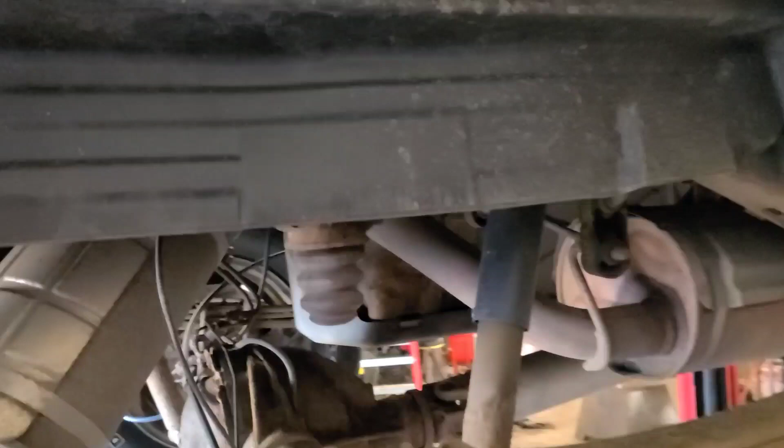So we're back working on this 2009 Chevy Silverado hybrid, and the customer elected to have me do the repairs on this thing, or attempt the repairs. So I'm going to reach up behind this inner fender skirt. You can put a little piece of 2x2 in here, and you can flex the skirt out enough to reach up there and pop the connector off of the frame. I need two hands to do it.

And we're going to try and fish the wiring harness down so that we can plug in the new sensor and see if the code clears. So there's the connector at the top of the frame. You have to push this little push pin out of the frame rail on the top, was quite a challenge. But if you use one of these clip tools, that works pretty good.

And the harness runs along the back of the frame here and then across above the spare tire. So check carefully at the connector back to see if there's any corroded terminals. I don't see anything here. So we're going to wait for the new speed sensor and simply plug it in. Plug it in and clear the code and see what happens.

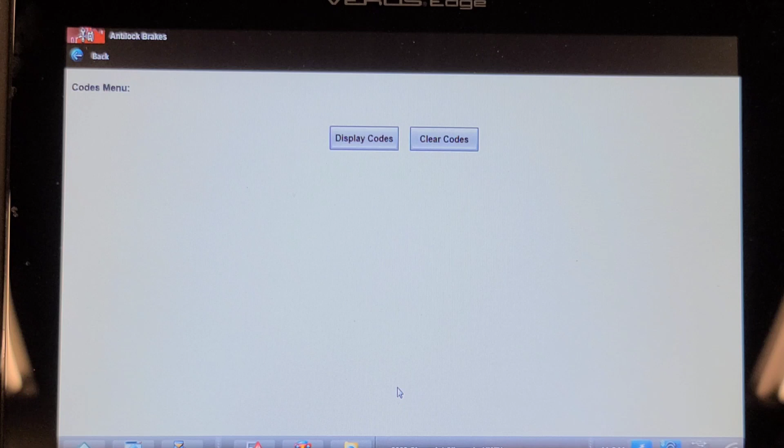Well, I've got the speed sensor plugged in. You see the ABS light is still on, traction control message is still there. Let's turn the headlights off. But the airbag warning light is off, so let's scan it and see what codes we've got. So we're going to go into the ABS, codes menu, clear codes. We'll give that a chance to reset if anything.

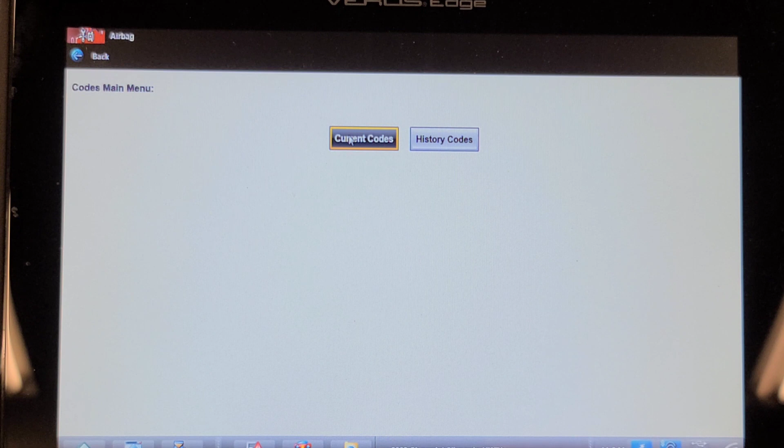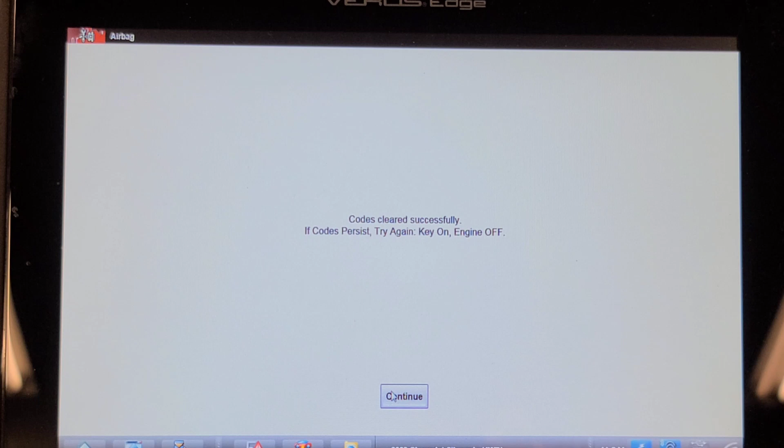We'll go into the airbag, display codes. Shouldn't be any current codes, but there should be a history code for the left crash sensor. Yeah, that's front end sensor 1. 1 is on the left side. So we're going to clear that code. We did change both sensors because the one good one was starting to split, and I put OEM sensors in it. So let's go back into the ABS now

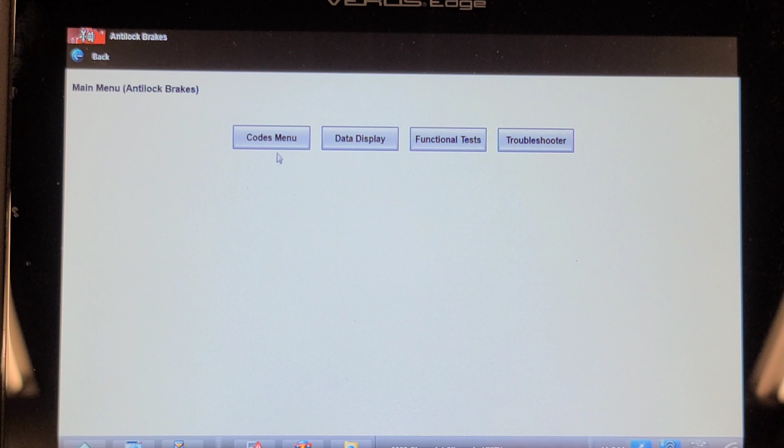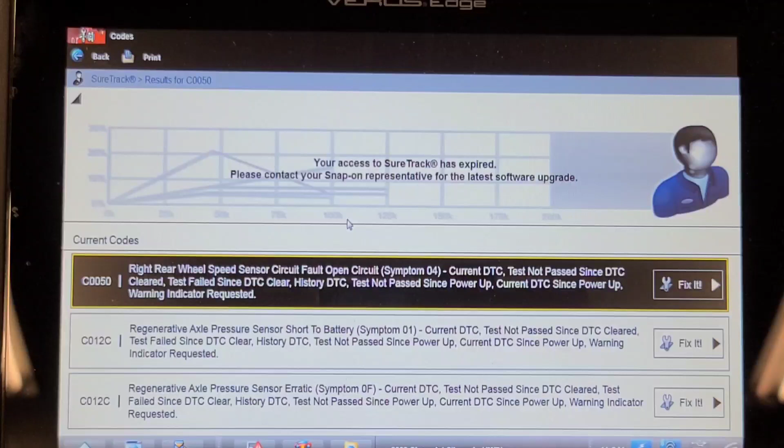and see what codes we have. Current. Oh no, that's not good. So we must have a wiring problem between the ABS hydraulic unit. Now we're going to have to check some wiring. So sometimes the codes don't clear on these ABS systems until you drive it over a certain speed. And I'm wondering if that's the case here.

So I'm going to check for a speed signal from first the left front. Yeah, and I'll go to the right front. Now, left rear. Now to do the right rear, I'm going to have to put a piece of metal in front of the sensor. Let's grab a screwdriver, and I'm going to try and simulate a signal. No, we got no signal.

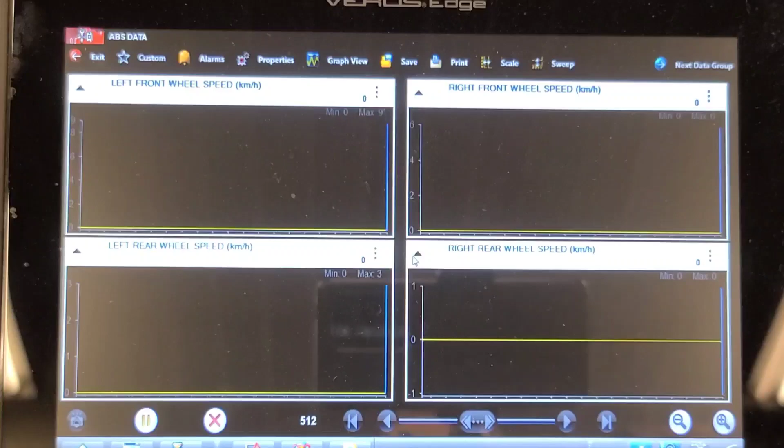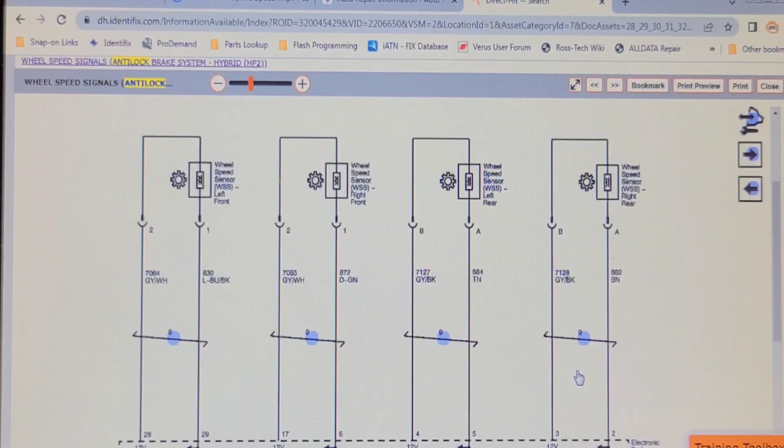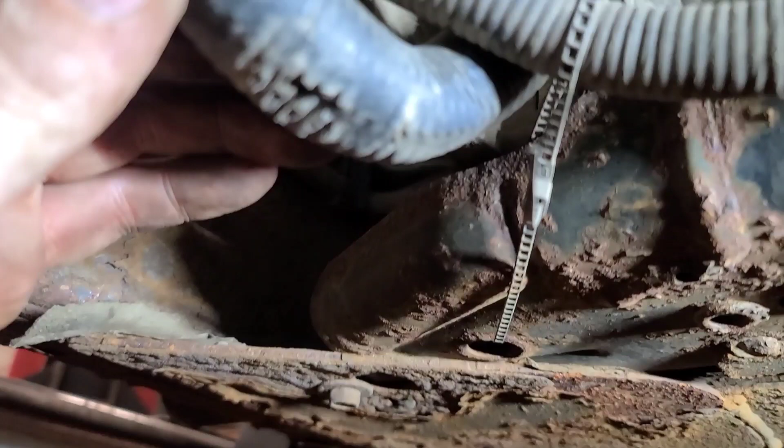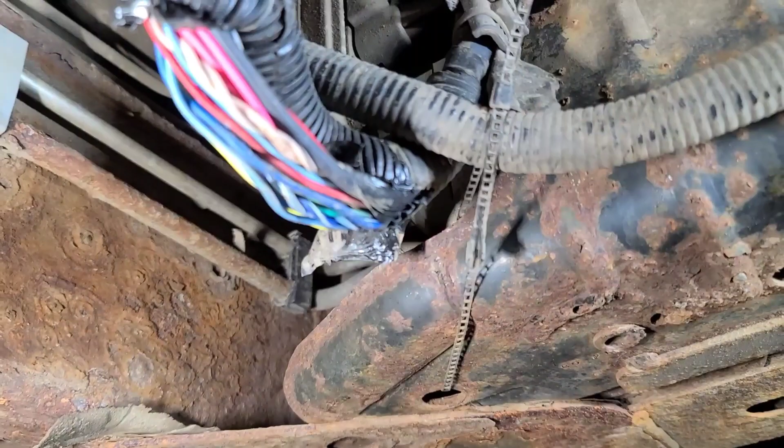So there's a little plastic shield underneath this ABS unit. It's considerably bigger than the non-hybrid version, but the wiring harness has been rubbing on the bottom of that shield, and it's worn through the loom, it's worn through the tape. I wonder if there's a compromised wire right there. So I peeled the insulation off of that. The wires look pristine. Got to find out what color these wires are that we're concerned about. We're going to take the connector apart up here.

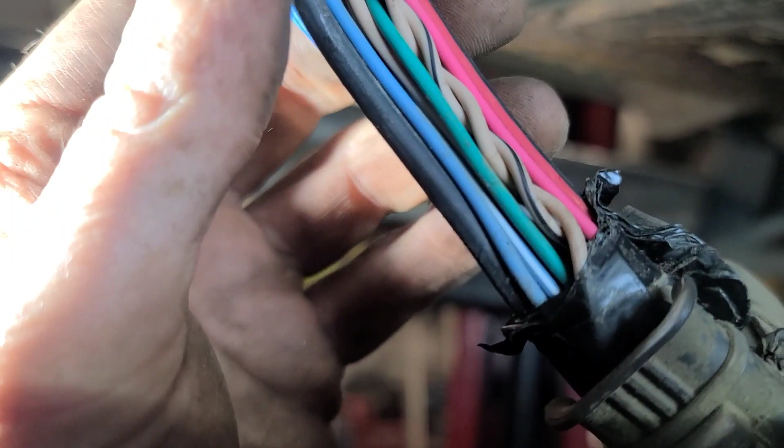So according to the schematic, the twisted pair should be gray, black, and brown. Well, I'm looking at the wires here. And I see, oh, there it is. Gray, black, and brown right there. And that's supposed to go to pins 2 and 3. I'll have to get a magnifying glass to see if there's any numbers on these pins, or get a pin out. I don't want to take this back cover off unless I have to.

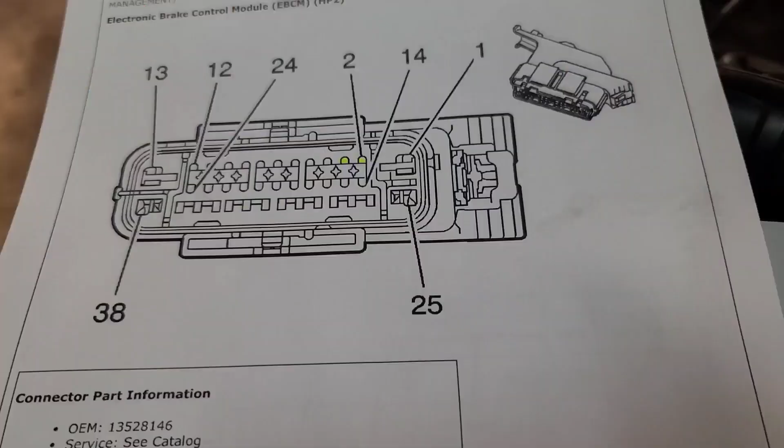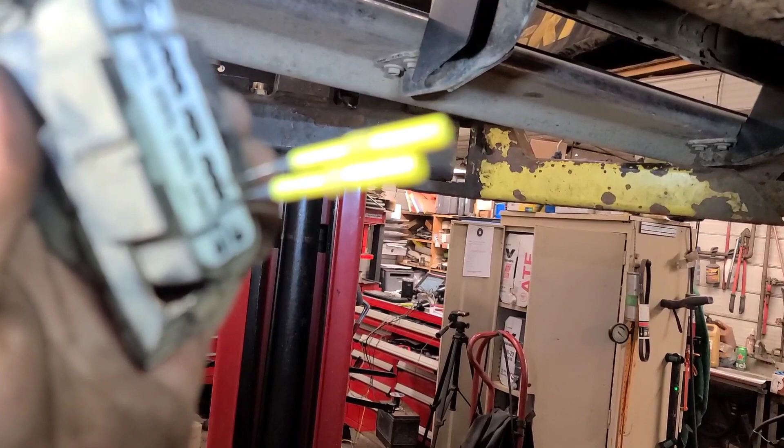So there's the connector view looking into the face. It's pins 2 and 3 according to the schematic. 2 and 3. So I'm using 2 probing pins, 24 thousandths of an inch. Don't use anything fatter than that or you'll spread the terminals inside there. So now we're going to check continuity between here and the back, and I'm going to put a couple of terminals on the harness at the back and jump them together to see if there's continuity now.

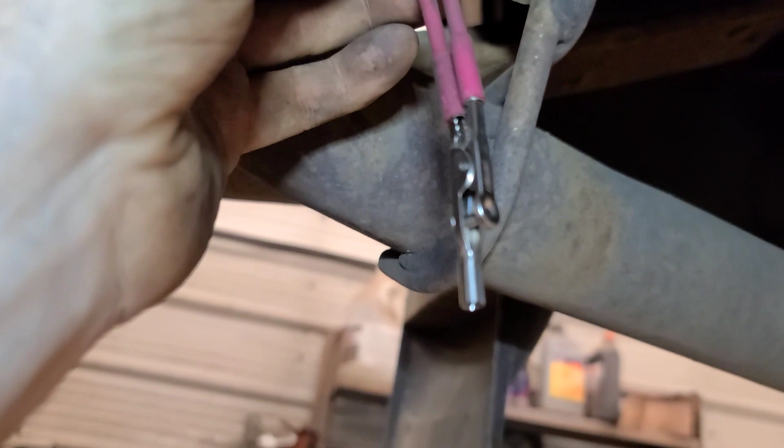So I got my ohm meter connected between pins 2 and 3, and at the back of the truck on this connector I've got 2 terminals in there, and I've got them shorted together, so I should have a loop. And according to the ohm meter, turn off this light, I've got greater than 40 ohms resistance. Let's see. Let's try 400K.

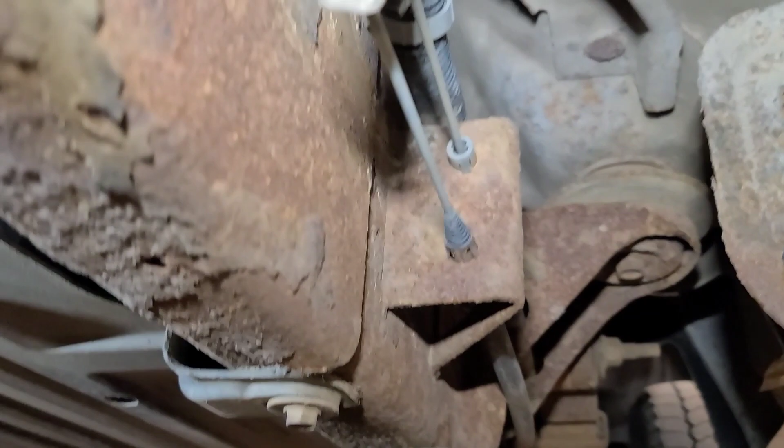So we have a corroded wire someplace. 265,000 ohms. Question is where? That wiring harness runs up over top of the frame, on the outside of the frame. So anywhere it might rub, there's a spot right above the parking brake bracket.

Well, what I'm going to do is graph the resistance and try moving the harness to see if I can see a change in the voltage, or the resistance. Okay, I'm reading 160K, so I'm going to try manipulating the harness. Of course, if the wire is completely corroded through by now, it's not going to change. Let's see if I can go up above the tank here. Above the spare tire, maybe.

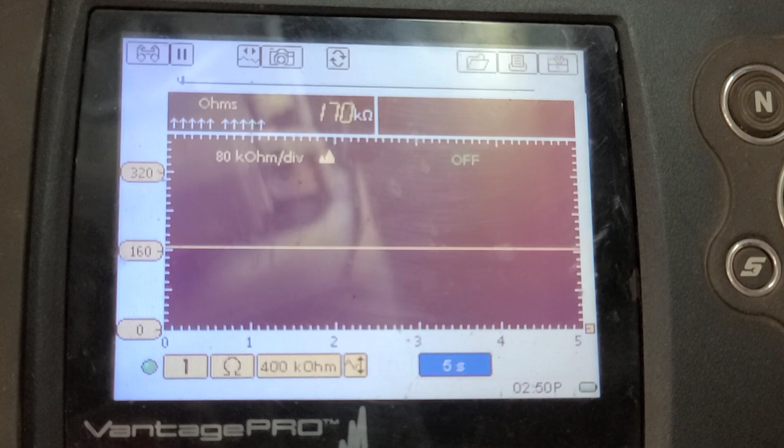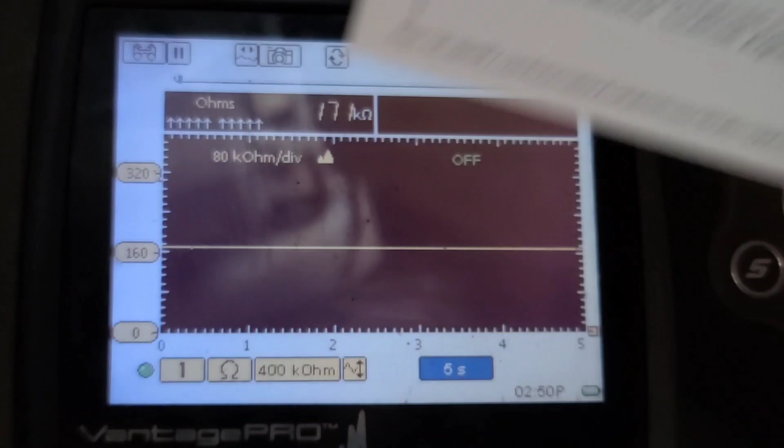Well, I'm going to see if I can find a spot in the middle of the harness to qualify it. There's no connectors in between, according to this. A and B is at the wheel speed sensor itself, and that's where I'm testing it. Well, I'm going to look around. So right at the actual connector, I'm manipulating the wires at the connector, and you can see the resistance is changing here. So something's wrong right in here.

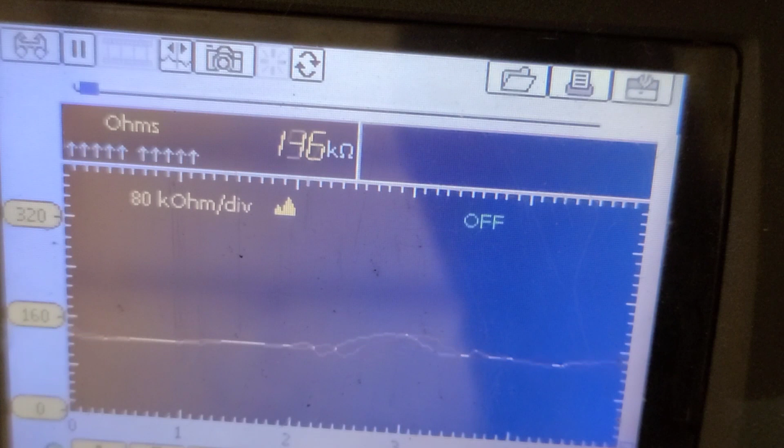Let's untape it. Nobody's been here. Nobody's touched this. Is it right at the terminal? No, it's not right at the terminal, as far as I can tell. Oh, my jumper fell off. Well, I'm going to untape this harness. I don't really want to drop the spare tire unless I have to.

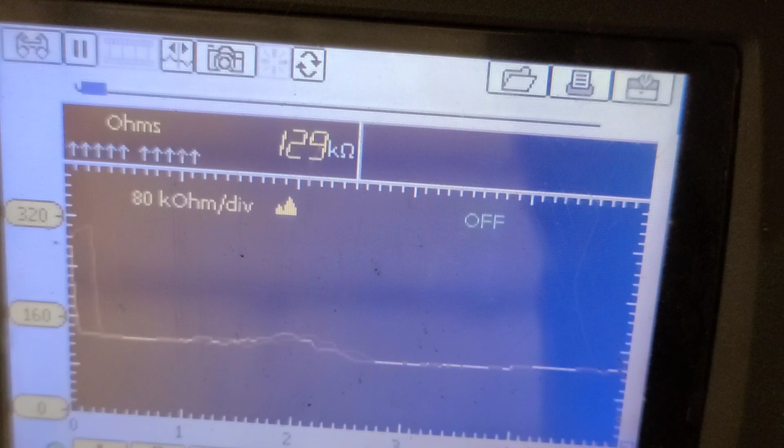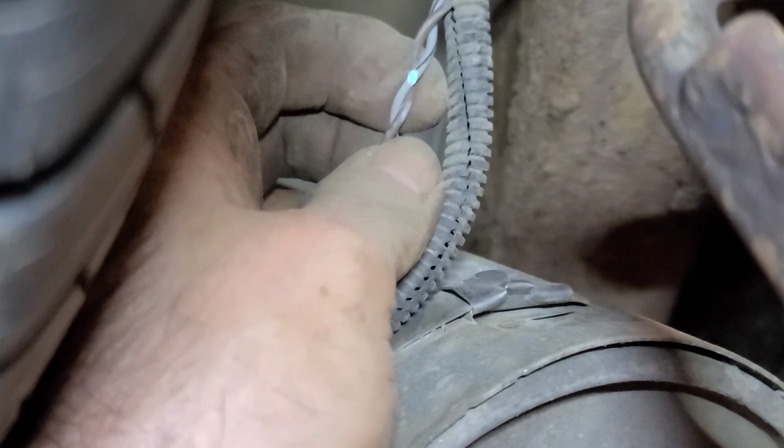Definitely in this spot. Now, how would that get compromised on top of the frame? This is why I love a graphing ohm meter. I'm not even loading the circuit with an ohm meter, but it should have been 0. I'm going to show you what I found. The green death. That's about 8 inches away from the connector. Well, that's the 15% I said yesterday.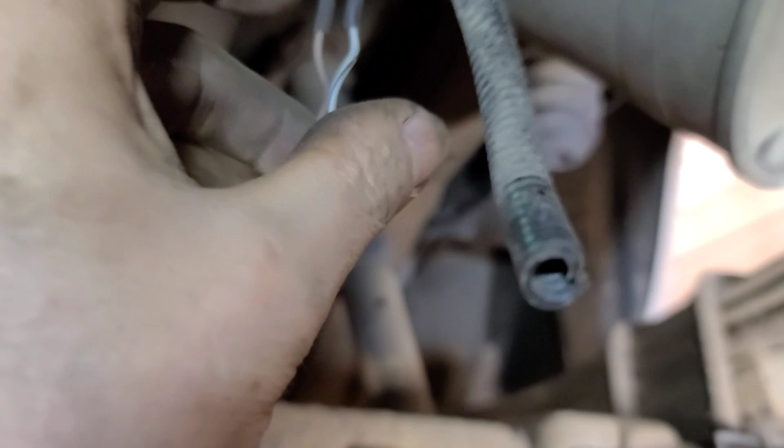So I use uninsulated butt splices and soldered and heat shrunk. I'm going to twist this back up again and tape it back up. Double check it with continuity. So I've got 0.3 ohms resistance. There's the compromised piece of wire. There had to be a pinhole in the insulation and the salt got in there and attacked it.

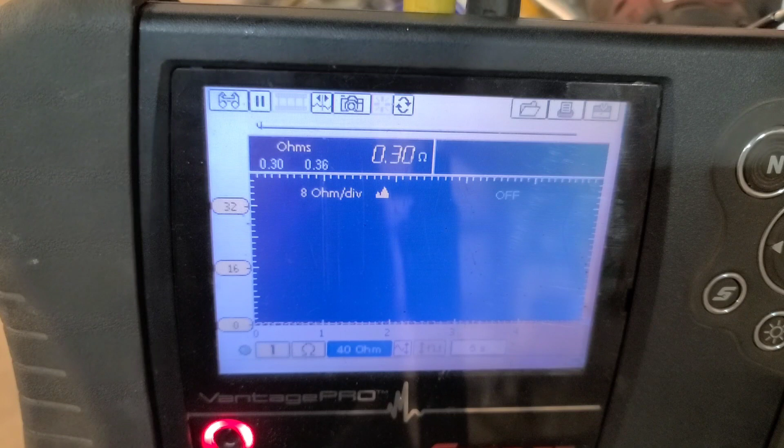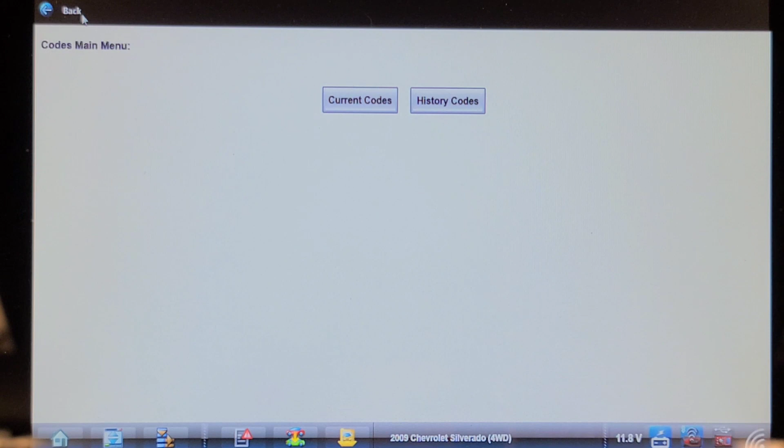So let's tape this up, put this back together, blow the sand out of that connector, put some dielectric grease on it, and hopefully that's going to clear the other code that was potentially going to require replacement of the hydraulic unit. Well, key on. That's a good sign. There's no ABS light. Display codes, current. Okay, we still got these regenerative axle pressure sensors short to battery. Let's see if we can clear those now. ABS light was off.

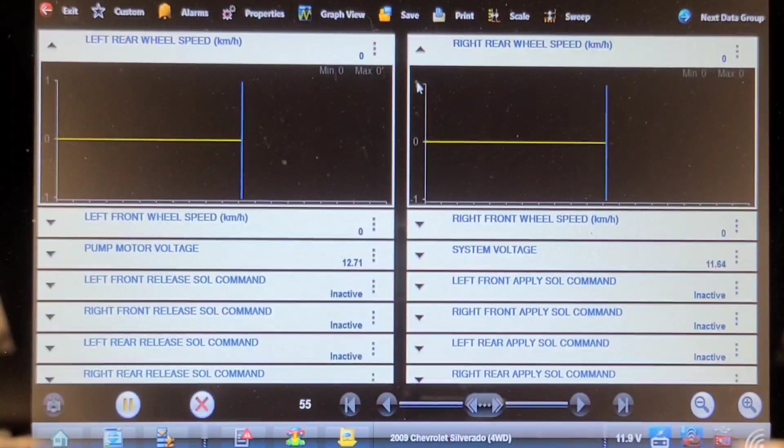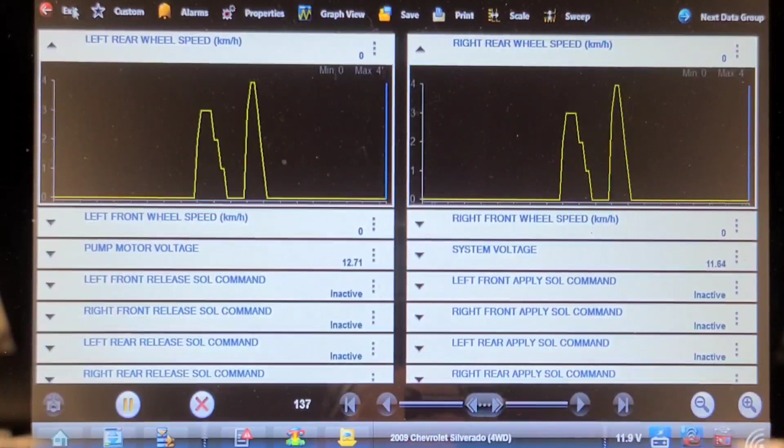Okay. Let's look at data, specifically the rear speed sensors now. Left rear, right rear. I'm going to turn both rear wheels. Good, we got speed signals on both sides. Beautiful. Let's check codes again, see if those regenerative codes came back. Yeah, they did. But the funny thing is, there's no ABS light on. I'm going to take it for a road test and see if they'll clear now.

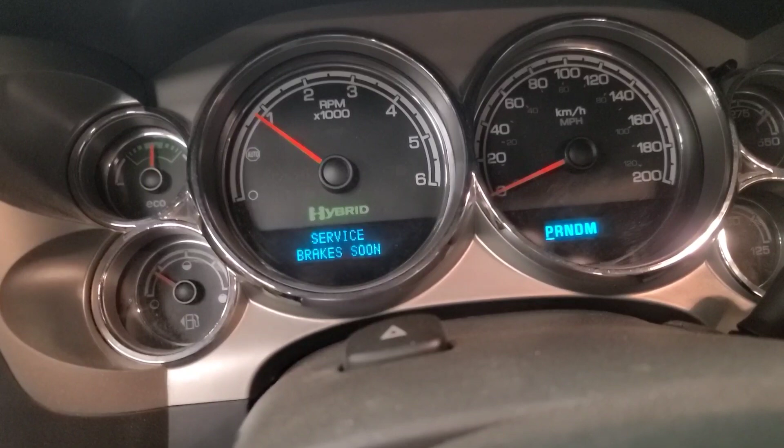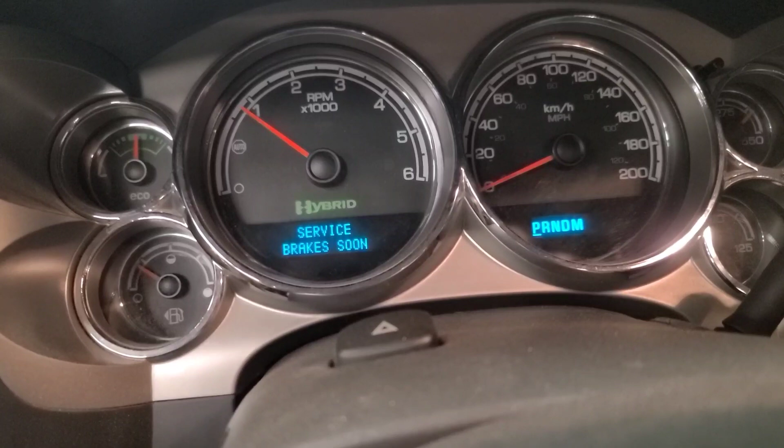Interestingly, the only message on now says service brakes soon. ABS light is off, traction control, StabiliTrak light, airbag warning light, and check engine light. I did change the 2 oxygen sensors as well. It said something about reinitializing, or let's read that fault code troubleshooting chart again.

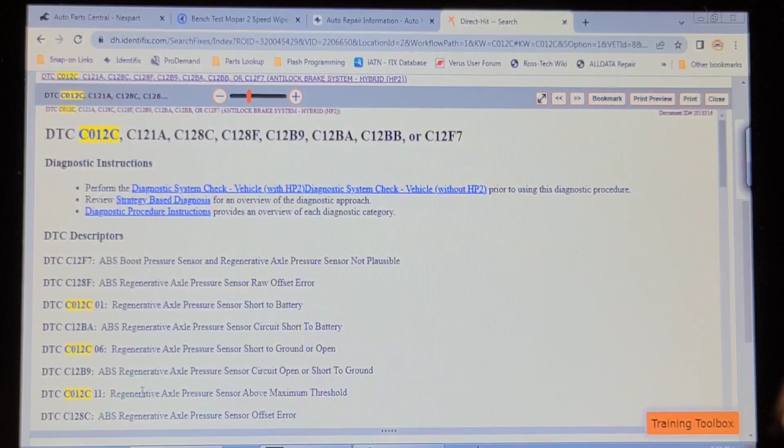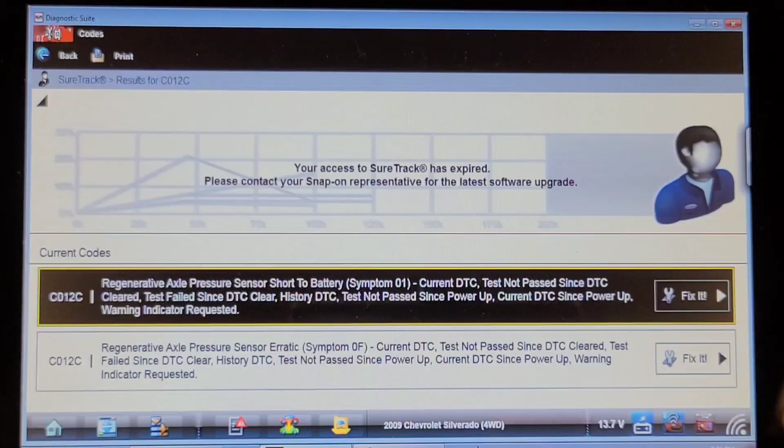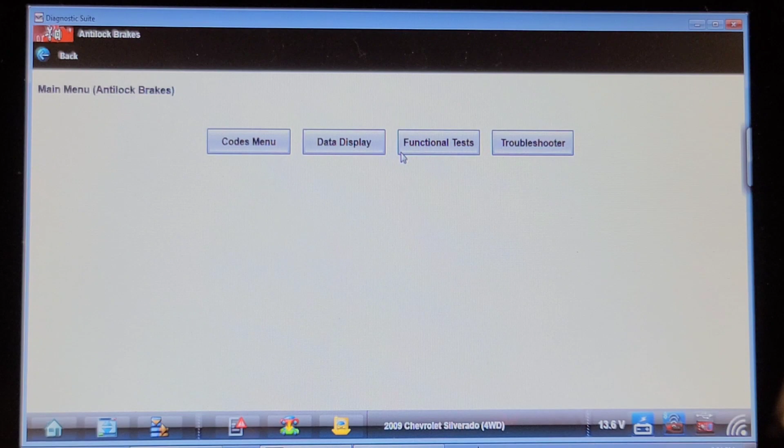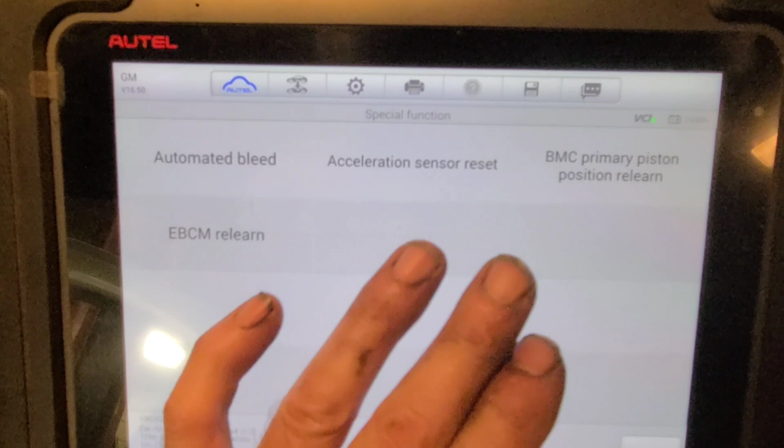ABS pump motor on and off. That's it. I'm sure that's not it. I'm going to hook up the Tech 2. So I hunted high and low for the DLC connector for my Tech 2 and I couldn't find it at first, so I decided I'd try my MaxiSys Elite, which I updated last year for nearly $2,000. And there in the special functions is automated bleed, acceleration sensor reset, BMC primary piston position relearn, and EBCM relearn.

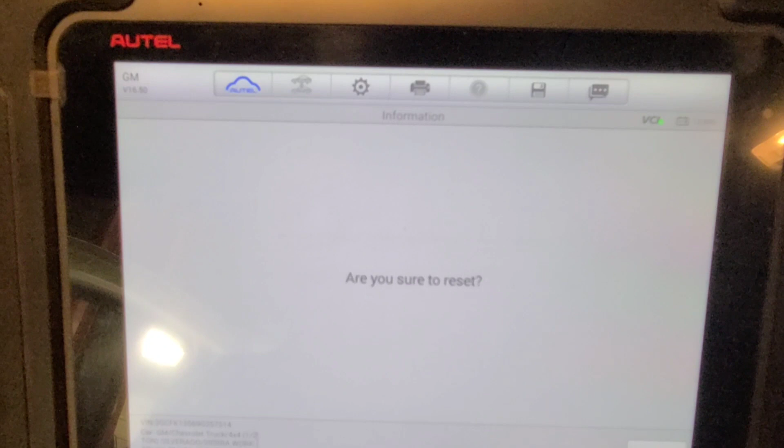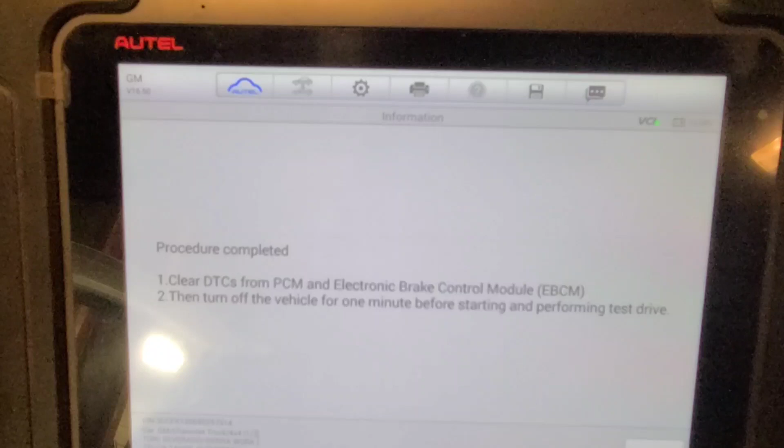Let's see if this works. Are you sure to reset? Okay, yes. Clear DTC, turn vehicle off for 1 minute before starting, performing test drive.

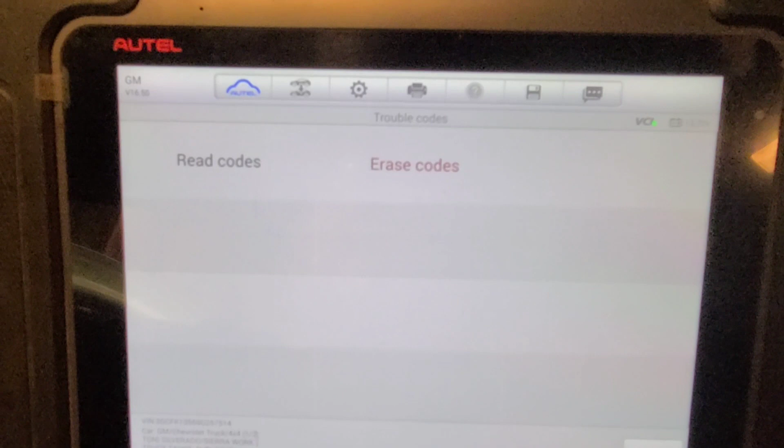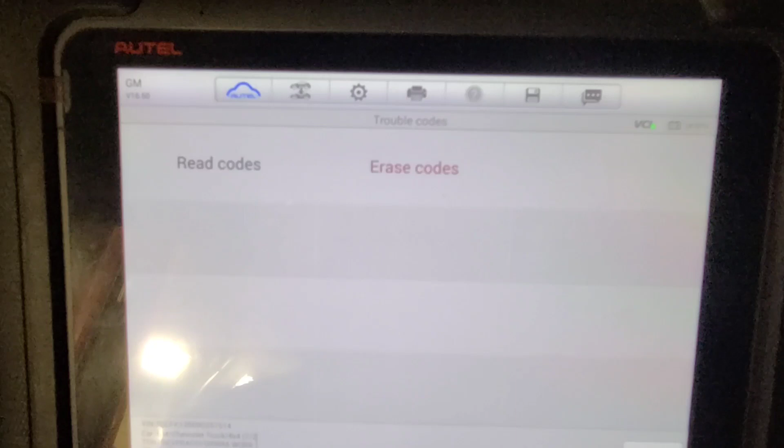Trouble codes, erase codes, yes, yes. Now we're going to turn the key off for a minute. Not going to make you wait a minute. Alright, that's been a minute. Turn the key on. Well, as you can see, service brake soon.

Read codes. Regenerative axle pressure sensor erratic. I'm going to try taking it for a test drive. So I've driven it a short distance and the service brake message is still on the dash.

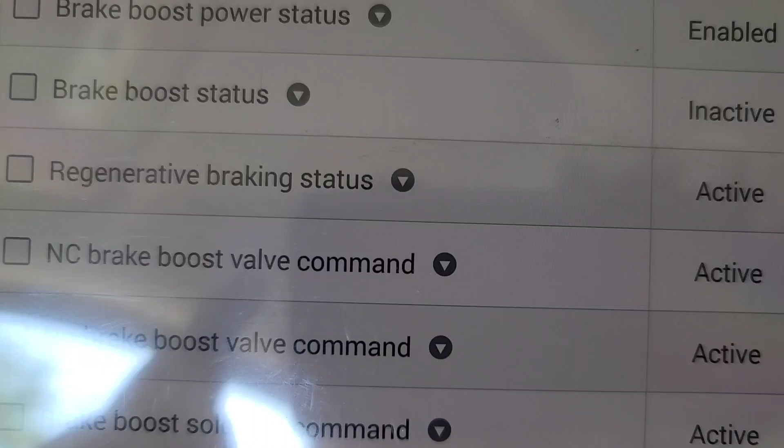In the data stream it shows regenerative braking status active, and I'm sitting here parked with my foot on the brake in drive, and it never changes. I don't know if that's normal to say inactive. Other than that, I don't see anything else in the data stream that is questionable. See, it says active all the time.

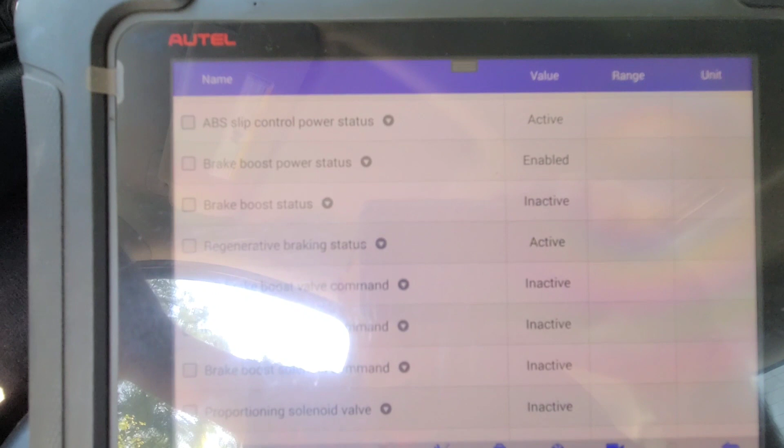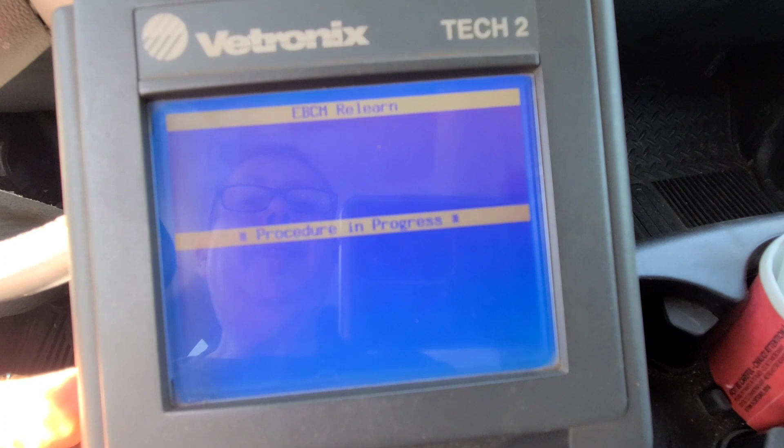I think I'm going to try the Tech 2 now. So I'm going to try this EBCM relearn with the Tech 2. I heard it do something. Reset. Now I actually have it in idle stop mode right now. Master cylinder pressure offset learn unsuccessful. I don't have my foot on the brake.

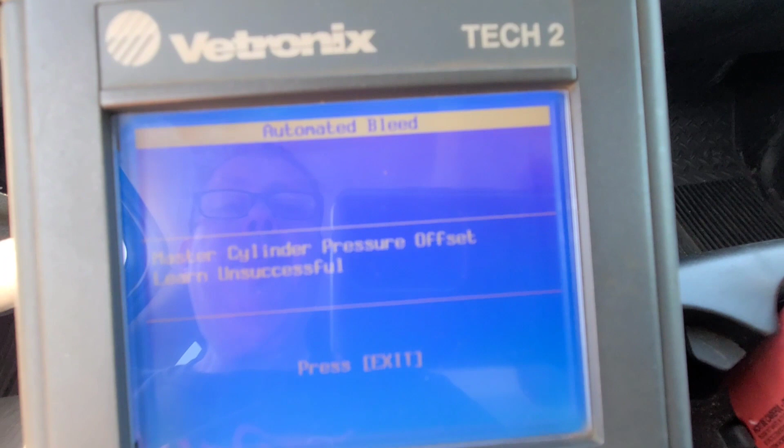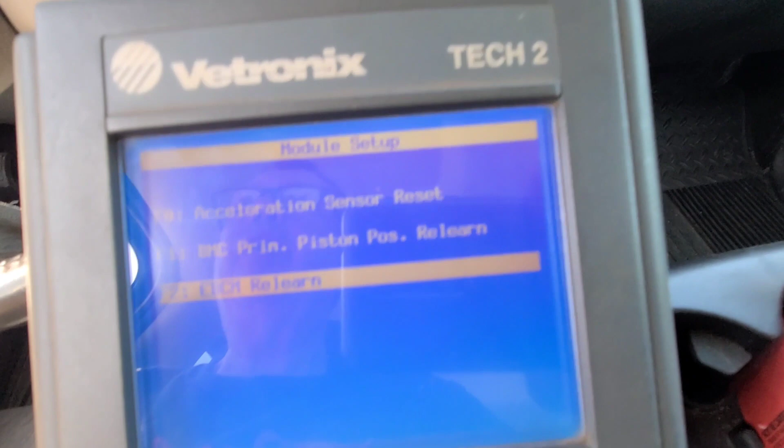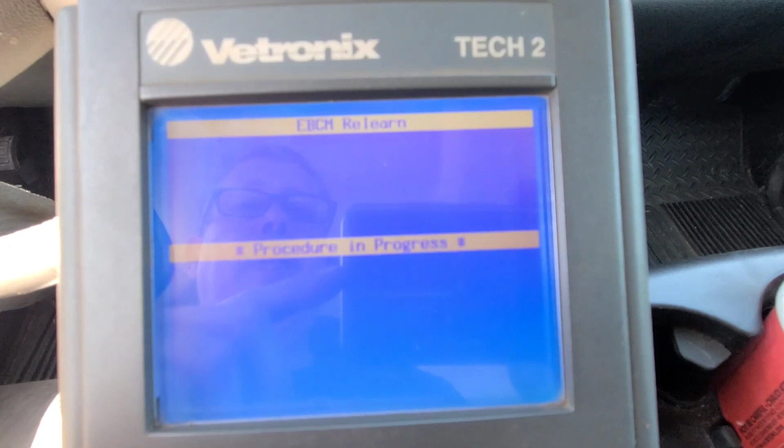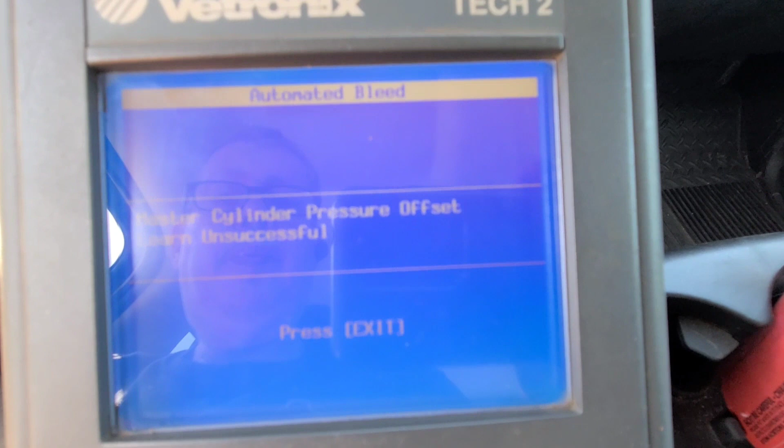Maybe I gotta do it with the key off, just in the run position, not with the engine running, where it's not really running, but when the tach is in 0, it's actually key on, engine off. When the tach is in auto, it's actually idle stop. So let's try this relearn again. Master cylinder pressure offset learn unsuccessful. Primary piston relearn. Acceleration sensor reset.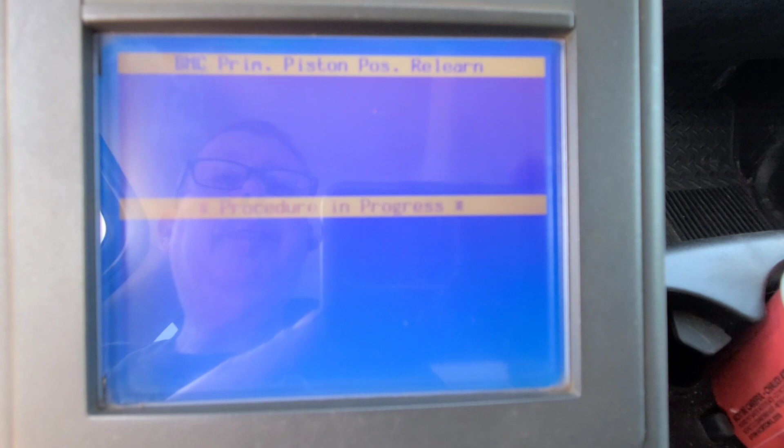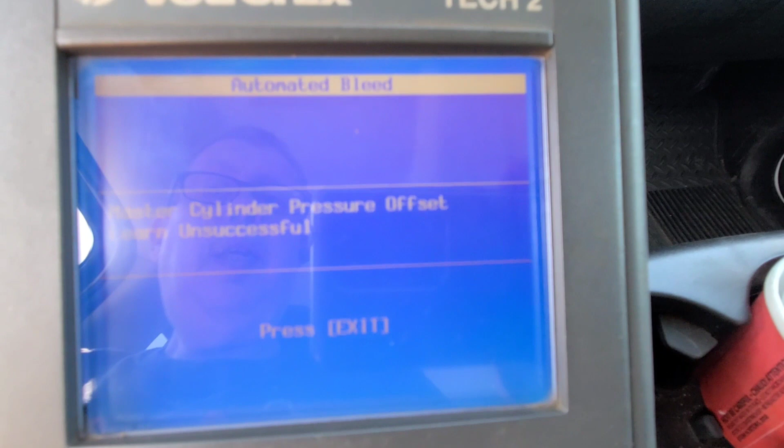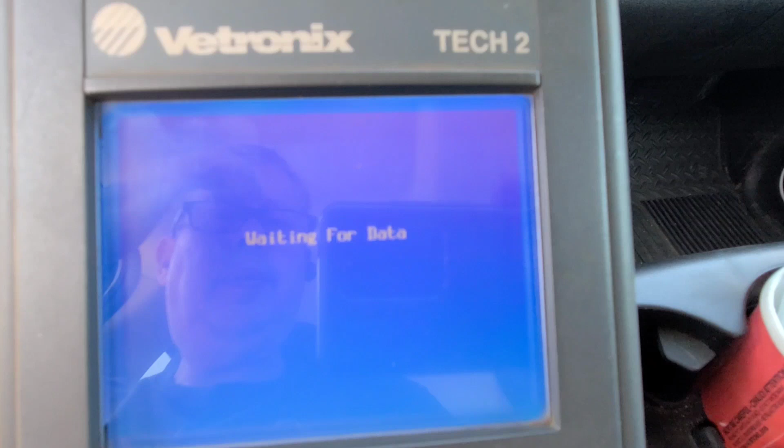Well, the service literature didn't say anything about foot on the brake or off the brake or exhausting brake, master cylinder pressure or anything like that. But nothing's working here. Let's look at data. We fixed the speed sensor. BCM primary piston position. I wonder what BCM stands for. Normally that's body control module, but it's got to be some other acronym.

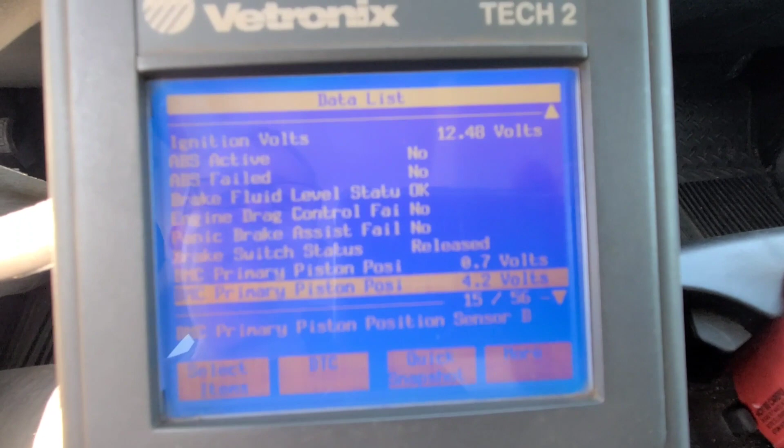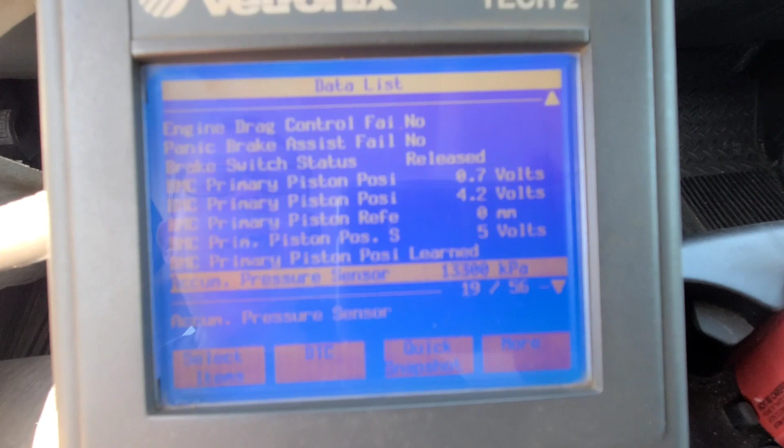Accumulator pressure. Master cylinder pressure, negative 100 kilopascals. I want 300 kilopascals. Brake pressure sensor. That doesn't make sense. Why is that jumping all over the place? When I step on the brake, it goes to 400, 500. Release the brake, goes to negative 100.

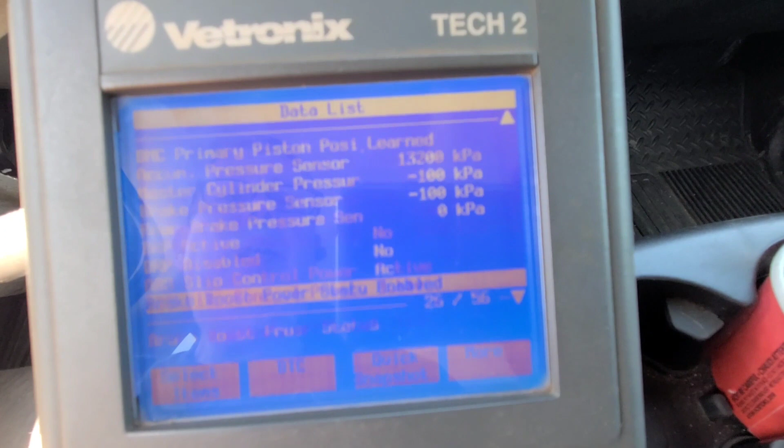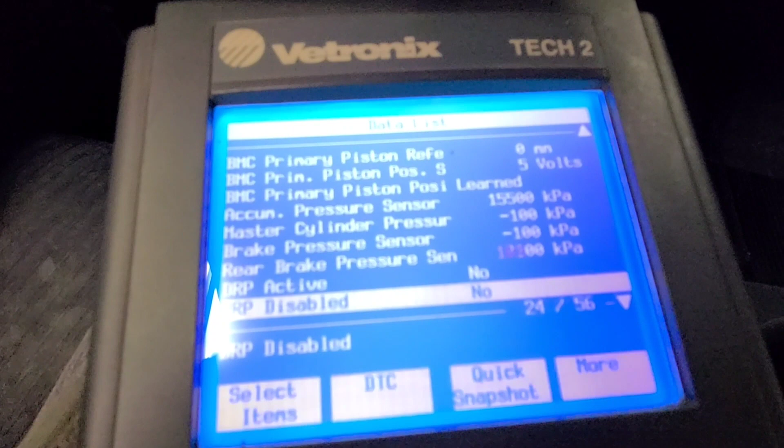Well, some very erratic data parameters on here. Master cylinder pressure is negative 100 kilopascals. Brake pressure sensor is jumping from negative 100 to 0. And the rear brake pressure sensor is jumping all over the place. 20,000. If I step on the brake, well, I have access to another one of these vehicles, but it's a Tahoe. I would imagine it's the same.

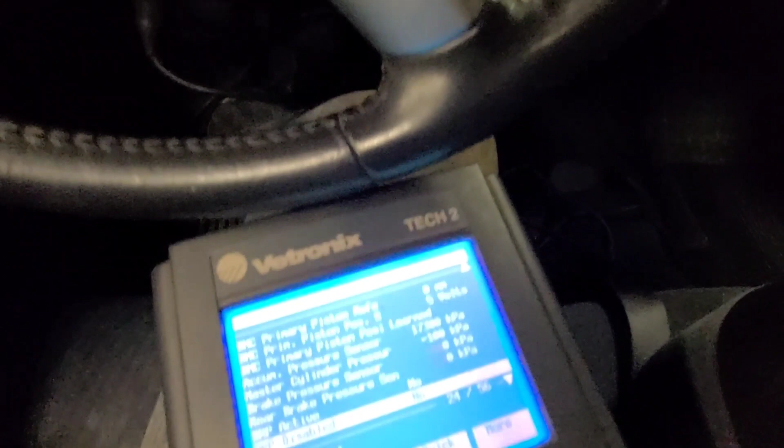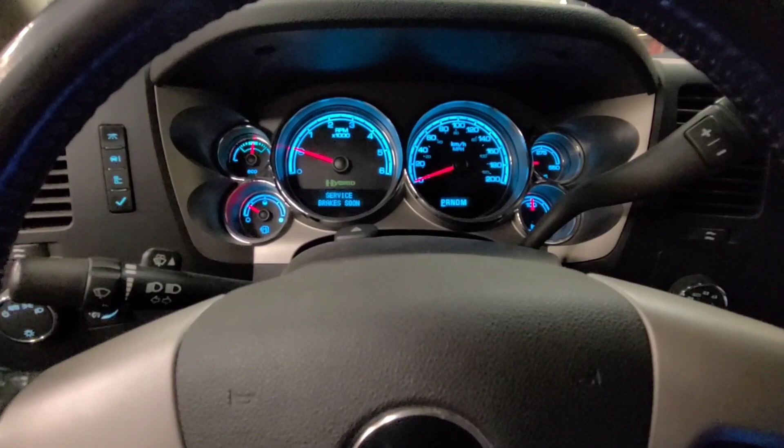I'm going to collect some data on it and see what's going on, because according to the trouble code chart, the next step is to replace the EHCU. I priced it out today. It's got to come from the States. It is available. It's 2,500 or 2,700 Canadian. Plus, it's not going to be 5 minutes to change because you got to undo all the hydraulic lines. So I'd rather be kind of sure of this before we do this. We did manage to get all the other lights to go out.

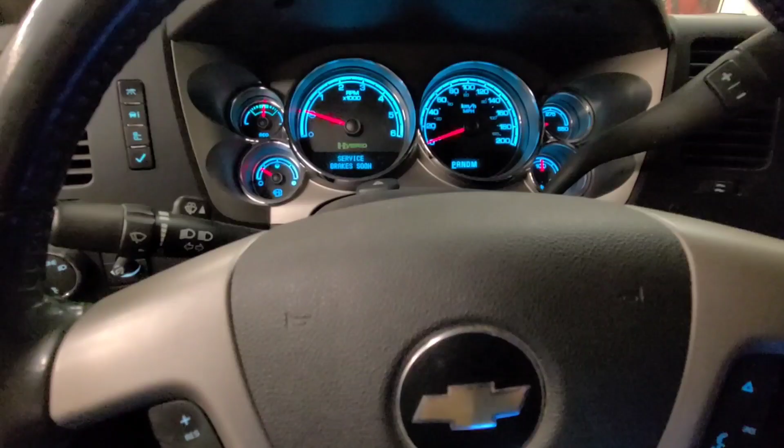I'm going to check the ECM to see if some of the brake sensor codes were turning on the check engine light. So in the EBCM, electronic brake control module, ABS module, it sets a C012C, but in the ECM it sets these codes, C12BA, B9, and BB. They're all basically the same fault.

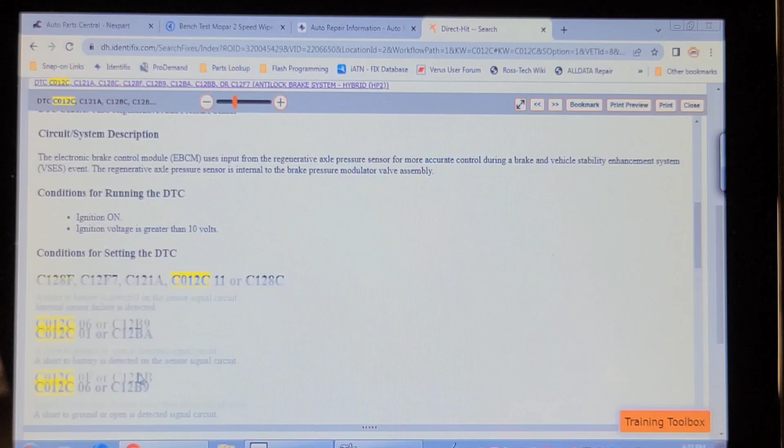So let's follow the trouble code chart. Using a scan tool, perform the EBCM module setup, EBCM relearn. Verify the DTC is not set. If the DTC is set, replace the brake pressure modulator valve assembly. If the DTC resets, replace the EBCM. So they want you to change the hydraulic unit first, and if that doesn't fix it, change the electronic brake control module, which is a separate part on the hydraulic unit.

I didn't price that. And I'm sure the EBCM has to be programmed to the vehicle. I would think the hydraulic portion of it would be plug and play, so to speak. Oh well, time to do some more research.

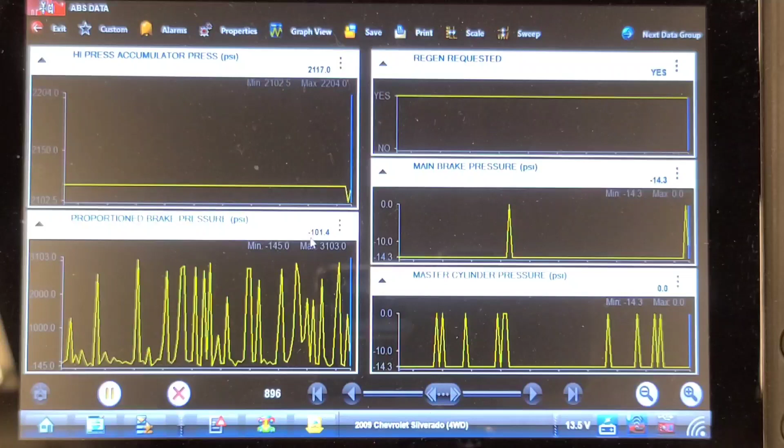So back to the Snap-on scan tool, you can see the proportioned brake pressure in PSI is jumping all over the place. Master cylinder pressure is at negative 14 PSI, which was negative 100 kPa. That might be normal. I don't know, but this one doesn't make sense. I'm going to step on the brake. So the accumulator pump ran, but this one's jumping all over the place.

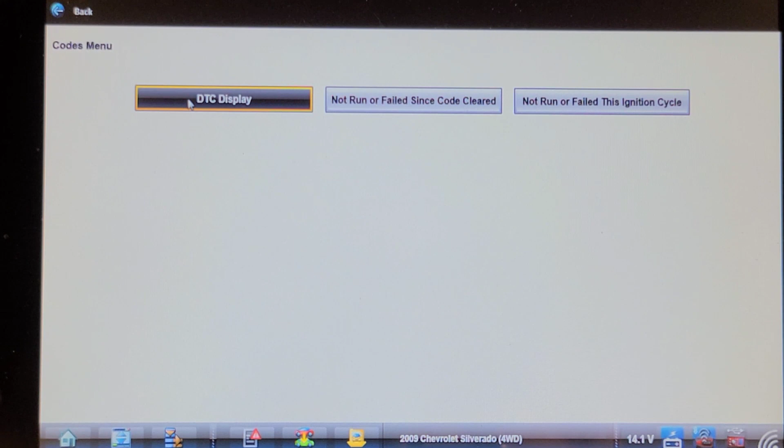So I went to take it out of the shop because I was going to give up for today, and the check engine light came on. I just want to see if there are any new codes now other than those regenerative braking codes. Doesn't look like it. So that answers the question. After a couple of cycles, these codes, or one of these codes, will turn on the MIL, which is a pain in the ass because now he's got an MIL on plus a message to service brake soon.